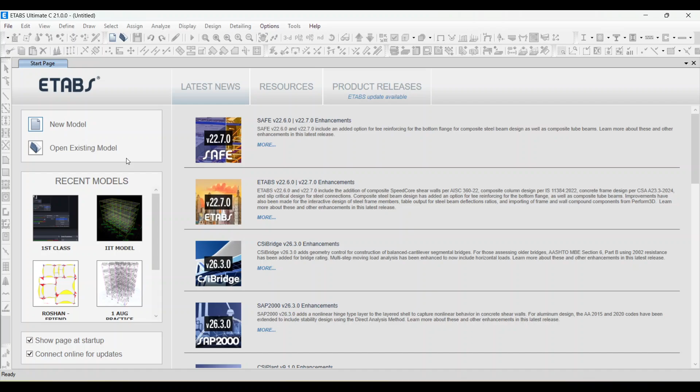Okay. So today we are going to make model by the grids. Okay. We have the grid, and according to that we will make the grids, and then we will make the model. So I will just click on the new model. Okay. And the settings are same: metric SI, India, Indian, IS 800 2007 and 456. I will click here, and I will take the same options. Okay, try to select the same options.

Okay, now in the previous class we understood how to make it by the uniform grid spacing, but generally this is not already available if you are working on the site or you get the plans.

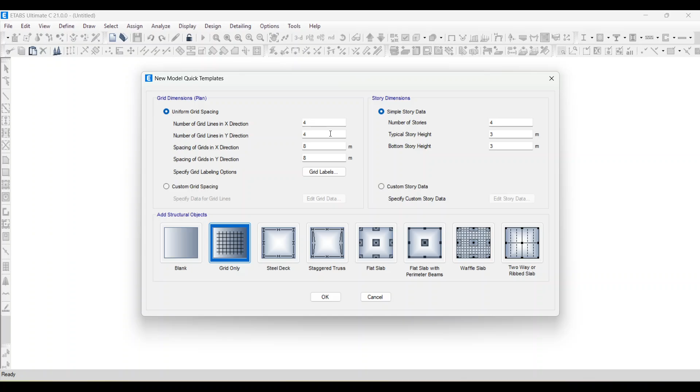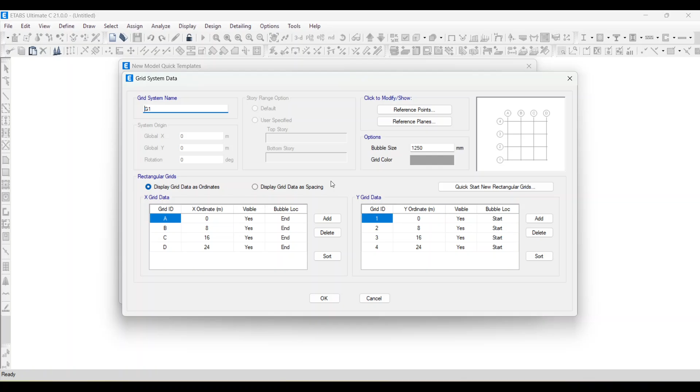So this is the main concept of the custom grid spacing. Okay, so I will click on it. I will go to edit grid data. Okay, and here you have two options: display grid data as ordinates and display grid data as spacing. Okay, so try to understand these 2 points.

Okay, so we will use this second option, display grid data as spacing, and according to that we will make the grids. Okay, so I will select this option, and now observe this grid. Here in the horizontal direction 1, 2, 3, 4, 5 numbering is given, and for the vertical A, B, C, D, E is given. So if we have the same grid, then according to that we need to make the same. Okay, you can't do it according to you. So I will make it like this: 1, 2, 3, 4, 5 is my horizontal, and A, B, C, D, E is my vertical.

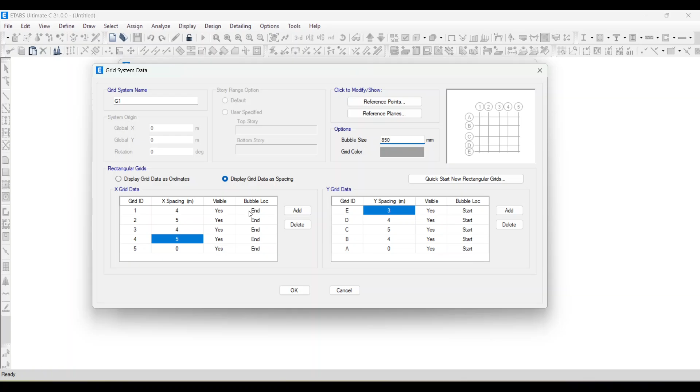And here you see the bubble size. This bubble size is so big here, so I will minimize it. I will make it 850 mm. Or if you want it smaller, you can just change the dimension from here. So this is the most important point on how to make the grids. And I will click OK.

And here you see simple story data. I will make 1.5 the bottom story height, that will be up to my plinth level. Typical story height is 3, and number of stories I will take 5. Okay, and I will just click OK. Just wait a minute while it is loading.

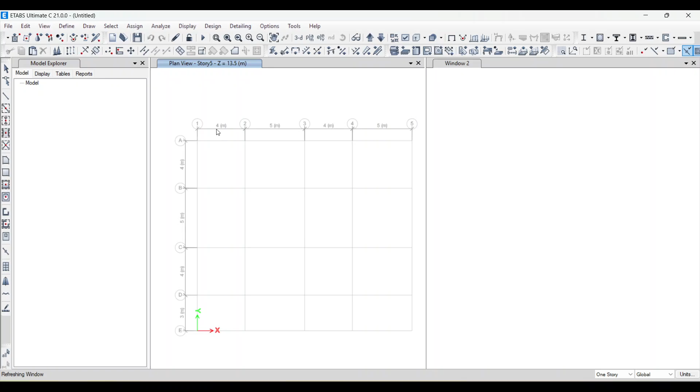Here you see 4, 5, 4, 5. Let's check whether your grids are properly created or not. Here you see 4, 5, 4, 5. It is okay. And here A, B, C, D: 4, 5, 4, 3. So our grids are proper. We did not make any mistake here. Now the next part is the same. In the previous class we already saw all these things.

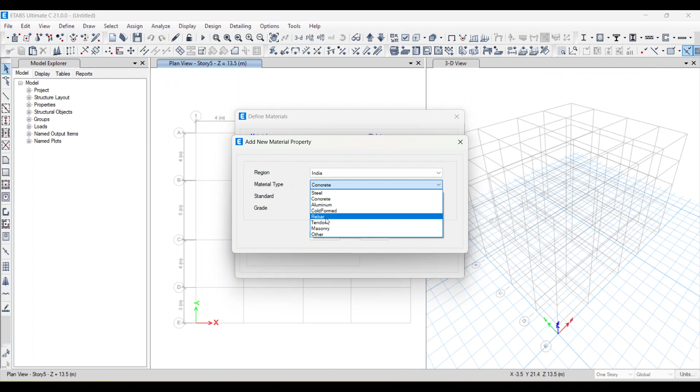First thing is we need to define the materials. Just go to define material properties. Add new material. India, concrete. Indian. What kind of grade do you want? I will take M25. And just click OK. Add new material. Go to rebar. I want HYSD 550. Just click OK and click OK. The materials are created.

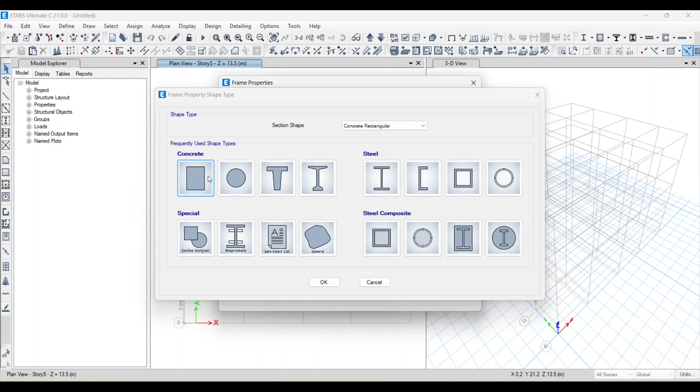Now I will select all stories, and I will go to define section properties and frame section. There's a lot of stuff here, so I will delete that. Go to add new property. I will take rectangular, and from here I will take the column size. I will take 300 by 525. According to experience you can take the size. That does not mean you can take any kind of size.

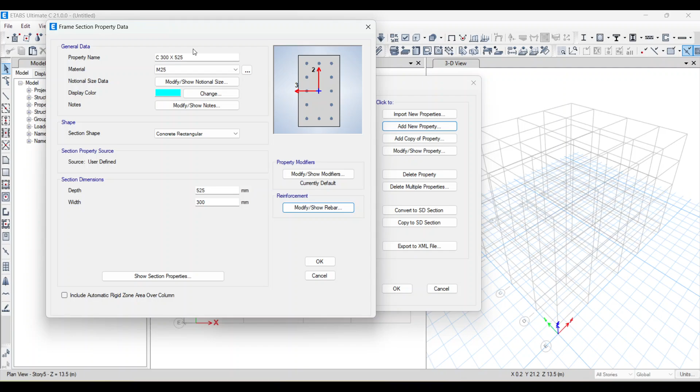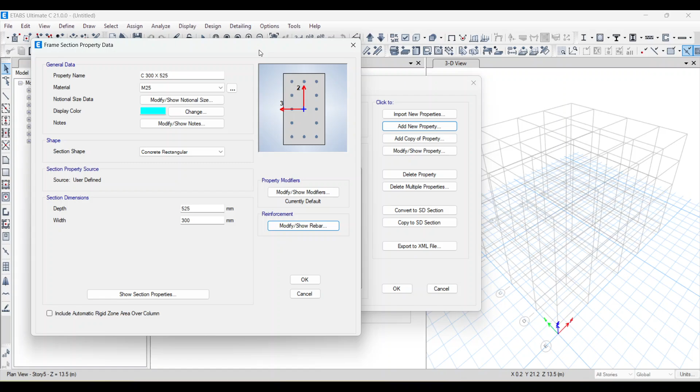So I will choose M25, width will be 300, depth will be 525, and modify rebar: HYSD 550, HYSD 550. So I'm taking the sizes according to experience, and after analysis if columns and beams are failing, then you can change to different sizes. If these columns are failing after the analysis, I can change this. Just click OK. I will delete this property, I do not require it. My column is defined.

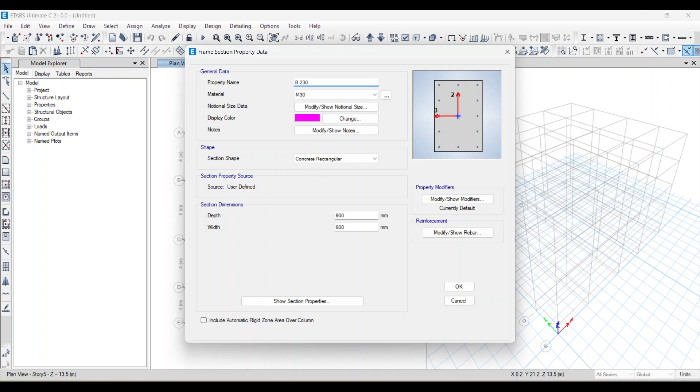Add new property again. Go to rectangular, and from here I will take the beam size, that will be 230 by 450. Choose the grade M25, 230 by 450. Modify rebar. Choose beam here, since we are designing the beam. HYSD 550, 550, and change cover to 40 mm. Click OK and click OK. So one beam is designed.

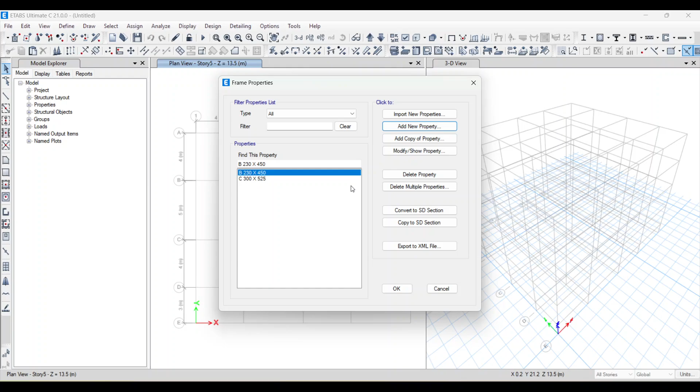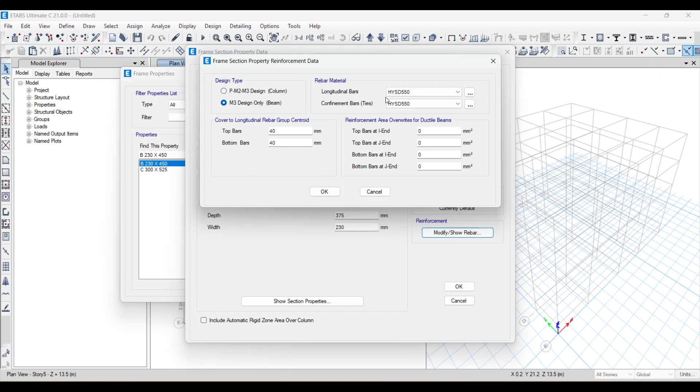I want to design one more beam, so I will just copy this beam. Add copy of property. I will give the name beam 230 by 375. Grade is okay. I will change the depth, and if you modify rebar, you will see beam and all things are the same because we did the copy. So click OK. So we defined two beams and one column. Just click OK, and now we are going to define the slab. So section properties, and here you have slab section.

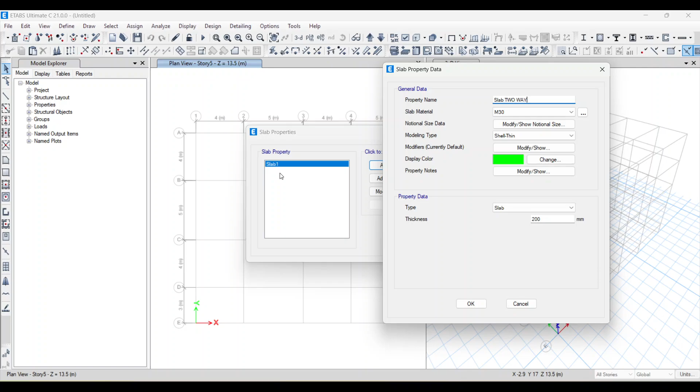I will delete it, I don't want it. Add new property. I will do a slab, a slab two-way. I will give the name two-way. Okay, because in this grid, if you see, this is 3 meter somewhere, and 3 by 4, 3 by 5 somewhere. So I know there will be a one way slab available. So okay, I will define the slab two-way.

Here I will take M25. Here I will give 125 mm. And okay, this is shell thin for the two-way slab. Just click OK. Okay, slab two-way, and add new property, because we will define the one way as well. Slab one way, and choose the grade M25.

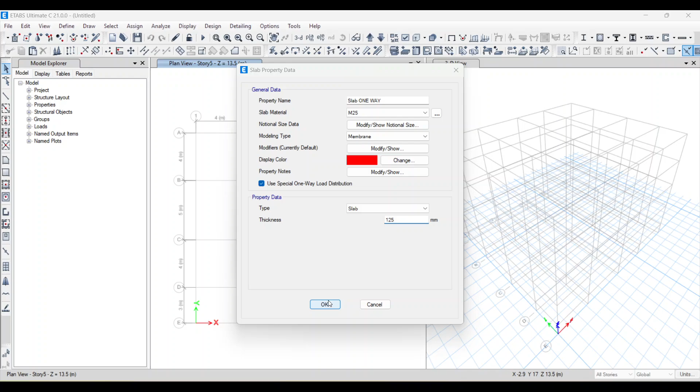Now for how to make it one way, you need to select membrane here. If you select membrane, one option is activated here. You need to select that: special one way load distribution. For the one way slab, you need to remember these two steps: membrane and special one way load distribution. And I will change the slab thickness, that is 125 mm. Just click OK. So these two slabs are defined, and I will just click on OK.

Okay, so my materials are defined, my frame sections are defined, slab is defined, and now I will assign them. So here I will do all stories. And then here is the option of quick draw columns. I just click on it, and here you see columns 300 by 525. Here you see the orientation of the column is in the horizontal direction. But I will check my grid for the orientation. In my grid, these columns are in the horizontal direction, and here also in the horizontal direction, and the remaining are all in the vertical direction. So according to that I will place my columns.

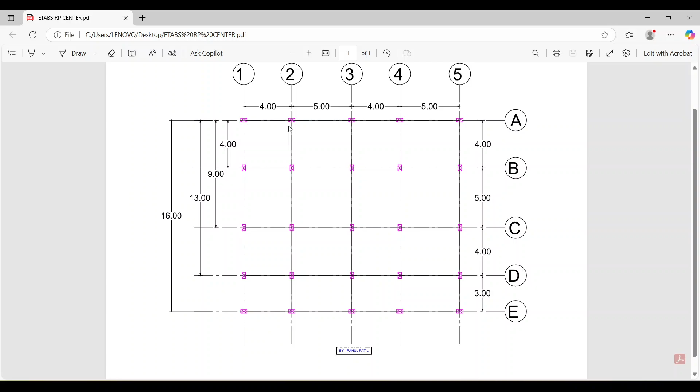I will go to ETABS, and I will just select this. I will select this, and I want vertical orientation columns now. So in the angle degree, I will make 90 and press enter. Here you see the orientation is changed now. So I just select like this, and here you see in the 3D, all my columns are generated.

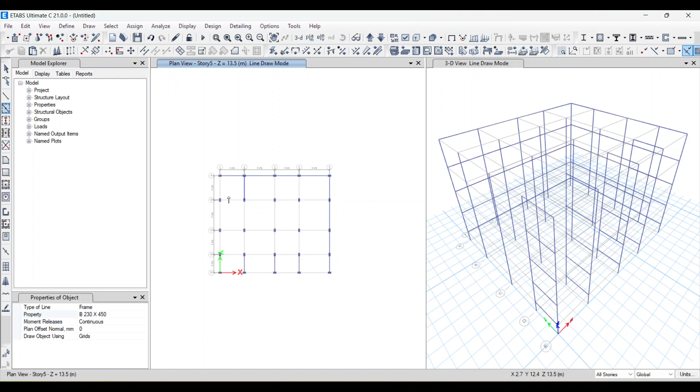Okay, so now I want to assign the beams. Here we have the option of quick draw beams. Just click on it, and from here select the beam. Here is a beam 230 into 375. I will select that, and I want this beam only in this 3 meter span, the shorter span. I will assign that, so I will just click here. Now I will select my beam, that is 230 by 450, for all the remaining, and I will just select them. Just assign this. Okay, so all my beams are assigned.

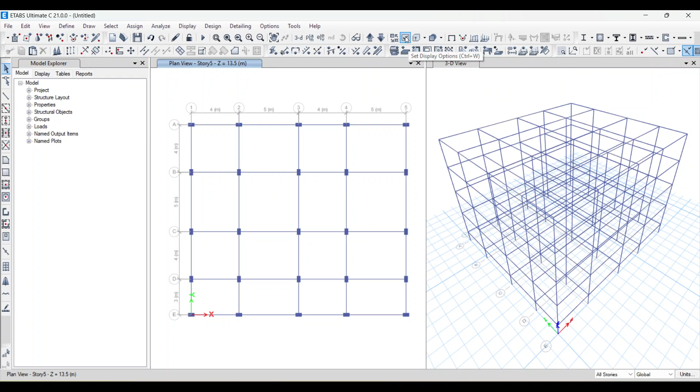So columns are assigned, beams are assigned. Now I want to check whether my beams are properly assigned or not. I want to see what property this beam has, the column numbers and all this. So here is the option: set display options. Just go into it, and here is object assignment. Click on it, and here you have the label options. Just click on labels and click on apply.

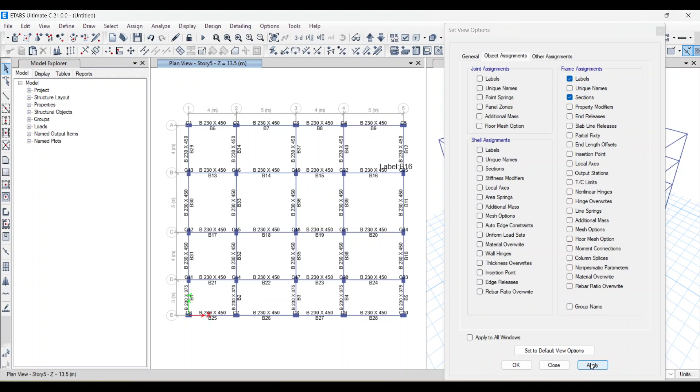And here you can see the beam numbers and the column numbers. The numbers are given by ETABS. And if you want to see the property of a particular beam, here we have section. Just click on section and apply, and just click OK. So here you see the column and beam dimensions. This beam dimension is 230 by 450. Here this beam dimension is 230 by 375. So this is how you can see the dimensions of the beams, the properties and all.

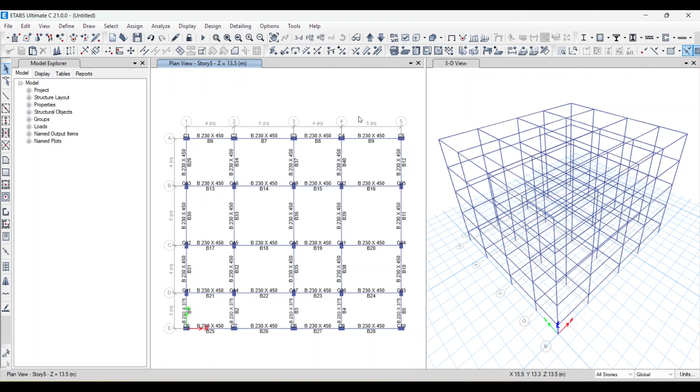Okay, so the remaining things we will see in the next lecture.